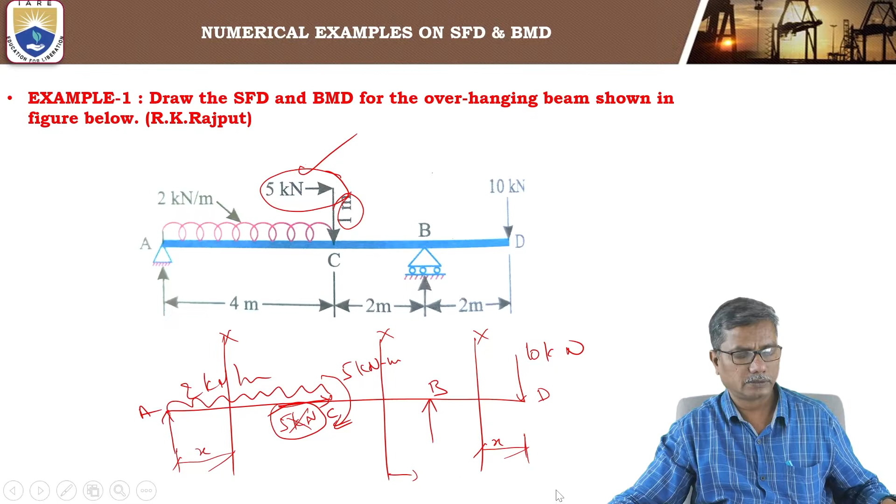Now with this, we will proceed to the first section between AC. So for this section between AC, considering the left hand side, origin taken at A.

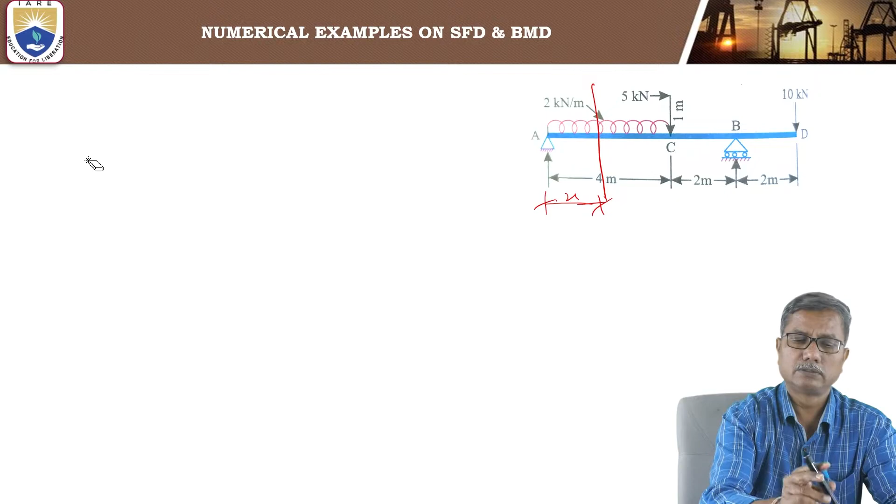Before that, we will find the reactions actually. So to find reactions RA and RB, we apply the conditions sigma MA equal to 0 and sigma Fy equal to 0. Two conditions we will apply to find the reactions RA and RB.

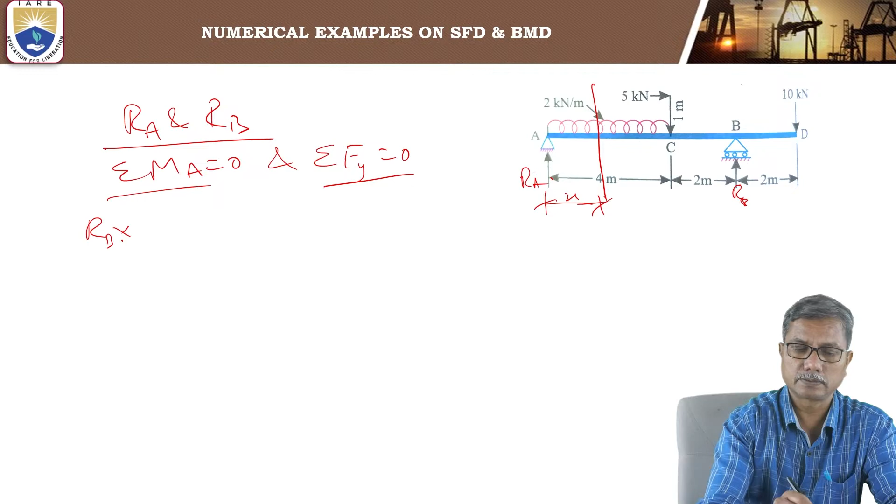So by applying the condition sigma MA equal to 0, we will have RB into 6 is equal to - in place of this, we have a couple acting, 5 kilonewton meter, we can replace this by a couple. Now the moments due to UDL: 2 into 4 into 2, where 2 is the distance of the resultant, plus 5 - this is a couple already, so we don't again multiply with the distance.

Plus 10 into 8. So now we will get reaction RB as 16.83 kilonewtons.

Once you get RB, we can find RA by applying the second condition, sigma Fy equal to 0. That is RA plus RB is equal to total downward load, which is 2 into 4 UDL plus 10 point load, that is 18. Therefore, RA is equal to 18 minus RB, 16.83, that is 1.17 kilonewtons.

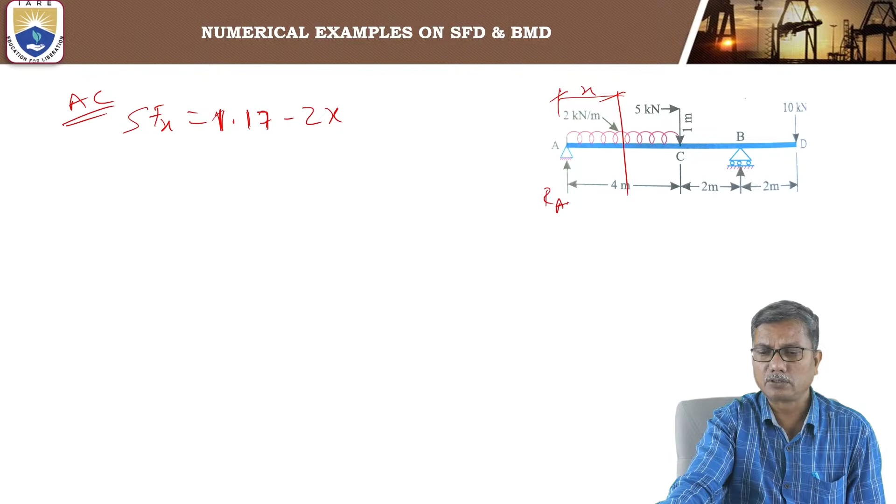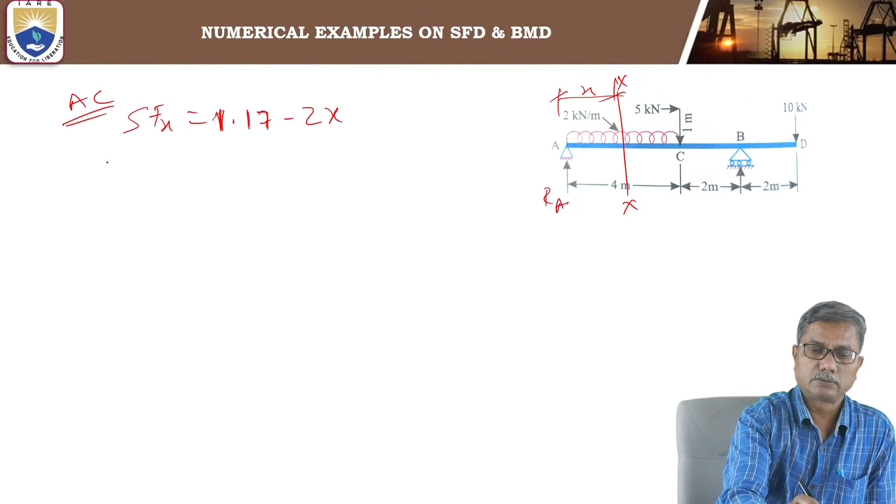Shear force at section X is RA, that is 1.17, minus UDL 2x, total UDL to the left of the section. So now the limits for X are 0 to 4. In portion AC, X varies from 0 to 4.

So at X equal to 0, the section will be at A and shear force at A is 1.17 minus 0, that is 1.17 kilonewton. It is positive only because the convention that we follow is left side upwards is positive and right side downwards is also positive.

Similarly, at X equal to 4, the section will be at C and shear force at C is 1.17 minus 2 into 4, that is minus 6.83.

So if you observe, the shear force is changing sign between A and C, which means it becomes 0 at one point. Shear force becomes 0, changing sign at one point from positive to negative.

So to find the location of that point where the shear force is 0, we equate shear force at X to 0. This implies 2x...

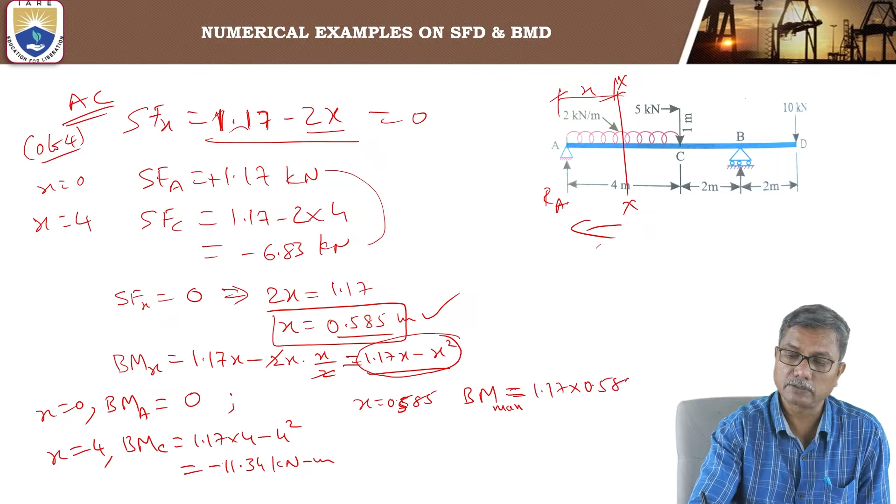1.17 into 0.585 minus 0.585 square, which comes out to be 0.342 kilonewton meters. We will be getting this positive plus 0.342 kilonewton meters. That's clear.

Between A and C, the bending moment also changes sign. It means, between A and C, bending moment also changes sign, because the maximum bending moment is positive and bending moment at C is negative, that is minus 11.34. It means bending moment is changing sign at some point between A and C, which is the point of contraflexure.

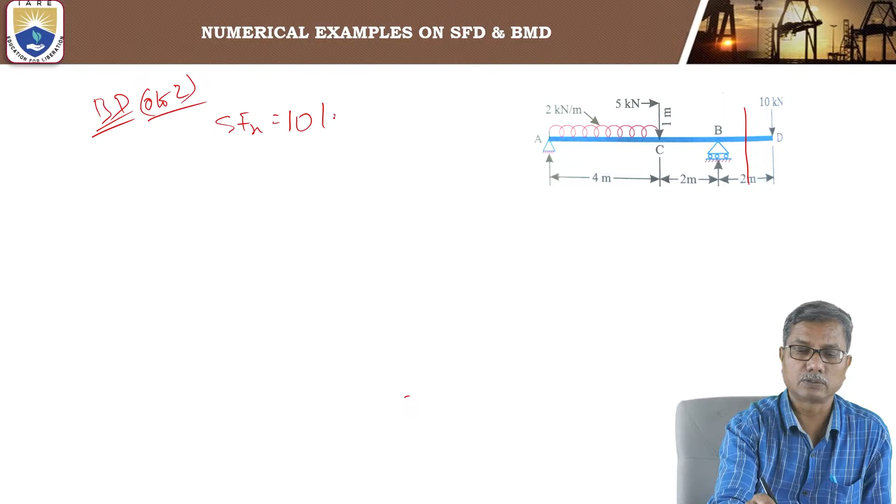Next, consider the section between B and D. Here you have only one force acting in this portion. This is the overhanging portion, and the limits for x are from 0 to 2. So shear force at x is 10 kilonewtons, right side downwards it is positive, and it remains constant from B to D because it is independent of distance. So shear force remains constant at 10 kilonewtons between B and D.

Now coming to bending moment, it is negative because it is hogging moment, so it is taken with a negative sign. Bending moment is minus 10x. So bending moment at D, that is at x equal to 0, is 0, and bending moment at B at x equal to 2 is minus 20 kilonewton meters.

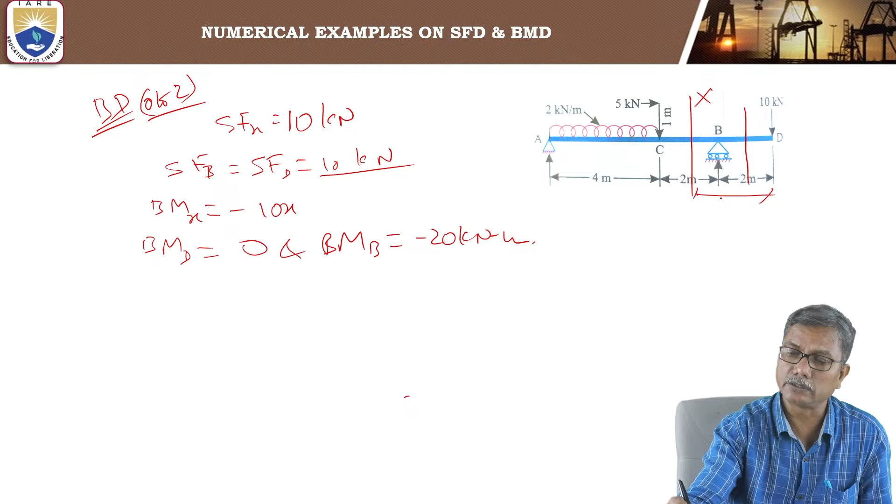Now consider section between B and C with origin at D only. The limits for x are 2 to 4 because we are taking origin at D. So now what is the shear force at x?

Shear force at the section is plus 10 minus RB. RB is 16.83, so it is minus 6.83. This remains constant between B and C because there is no load acting. So shear force at B equal to shear force at C equal to minus 6.83 kilonewtons.

Shear force at B, just to the left hand side, coming to this shear force at B here, just to the right of section B, it is 10. Just to the left, it is minus 6.83. That means at B, there will be a sudden change in shear force because of the reaction RB, and that change is equal to RB.

So now, to draw the shear force diagram, at A it is 1.17 and at C it is 6.83 minus. So it varies from plus 1.17 to minus 6.83, changing sign at this point. Let us call this point E, which is at a distance of 0.585 meters from here.

Now, between C and B, the shear force remains constant at 6.8. At B, you will have a sudden increase in the shear force because of the reaction. And between B and D, the shear force again remains constant at 10. So this is positive shear force, and negative shear force we will have here.

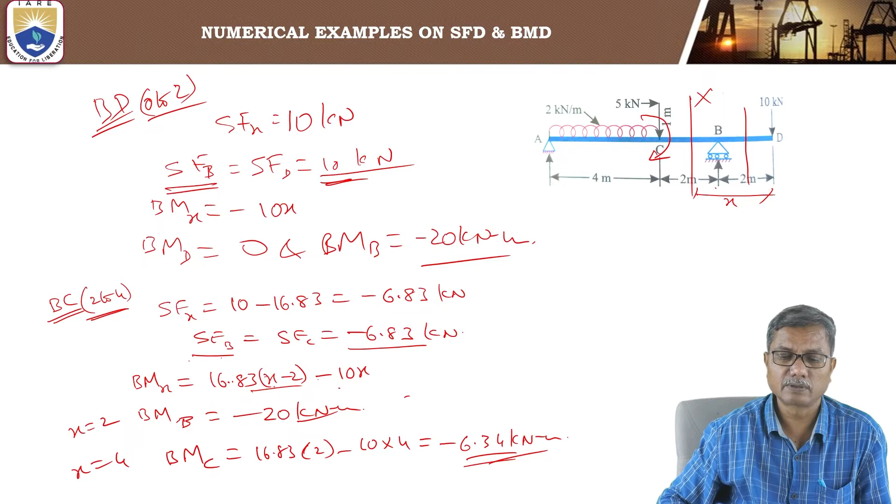It is generally not drawn to scale, actually very small, 0.342. It varies linearly. From A to C, it is parabolic only, and it varies up to 11.34, and there will be a sudden change here to 6.34 by 5 units, because of the couple. And from 6.34 it changes to 20, which is linear variation, a straight line.

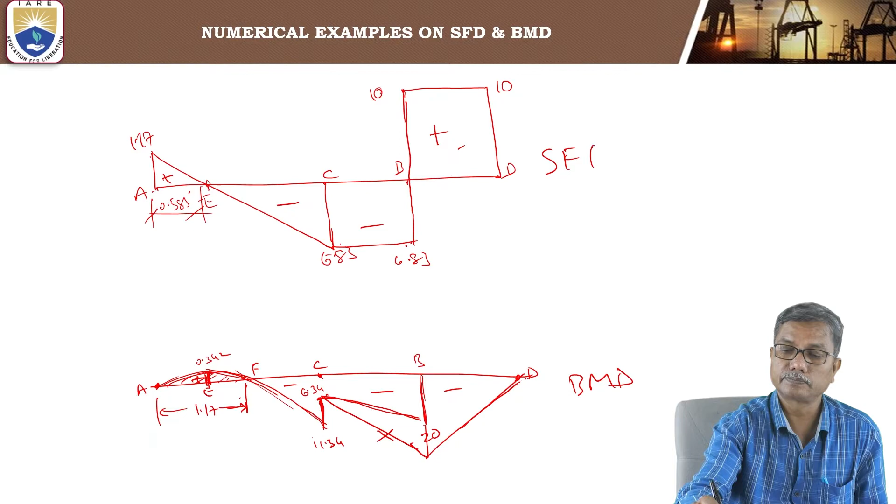So positive bending moment is here. This distance is 1.17, the point of contraflexion, and this is the point of maximum positive bending moment. This is how the bending moment diagram will be shown. So this is the bending moment diagram and shear force diagram for the given problem.

Let us take another example, which is a beam overhanging on both sides, supporting a UDL and a point load. Let us consider this second example of an overhanging beam on either side, overhanging at both supports A and B, and supporting a UDL and a point load.

So now, as usual, we find the reactions RA and RB. Applying the condition sigma MA equal to 0, you will have RB into 11, that is anti-clockwise, RB into 11.

And the portion of UDL to the left of A also produces an anti-clockwise moment. So the moment of this UDL, 30 into 3 into 1.5, is also anti-clockwise. That is equal to the moment of the UDL lying to the right of A, for a length of 5.5 meters, total length of UDL being 8.5. So 30 into 5.5 into half of that is 2.75, plus 100 into 11 plus 4, that is 15. This gives the reaction RB as 165.3 kilonewton.

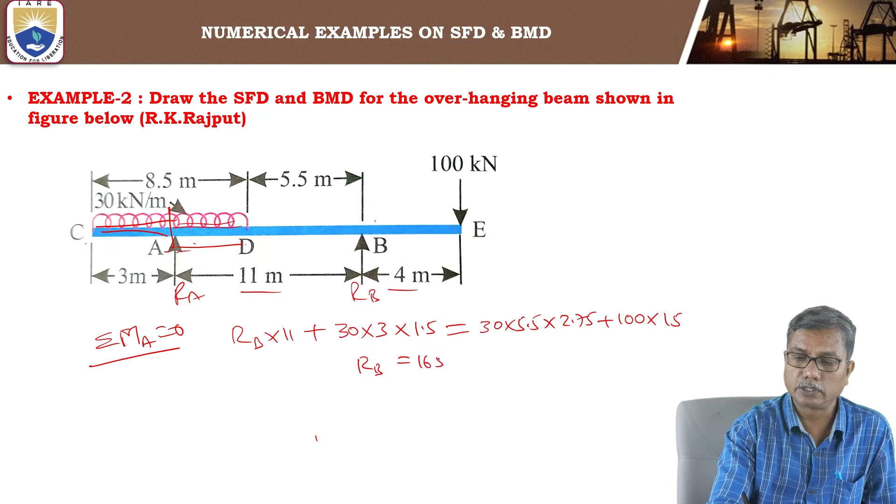Now we can find RA as total downward load, 30 into 8.5 plus 100, minus RB of 165.3, which comes out to be 189.7 kilonewtons.

So first we have to find the reactions before proceeding to calculate the shear force and bending moment. Once you know the reactions RA and RB, then it becomes easy. Now, how many sections do you have to consider? Just observe—we need to consider 4 sections.

Okay, 4 different sections we have to consider for finding out the shear force and bending moment at various sections.

The first section we consider is between A and C, taking origin at C. Similarly, for the second section also we'll take origin at C. For the third and fourth, we'll take origin at E. So consider first the section between A and C.

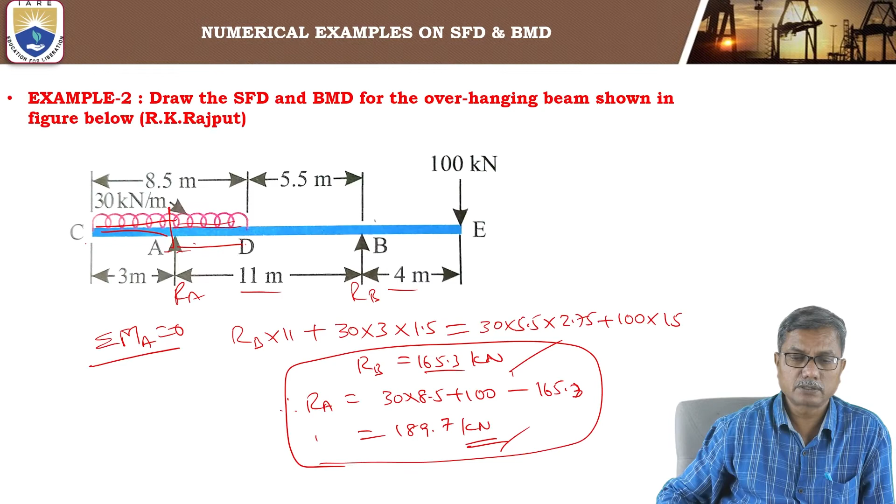So on the left side, downwards, you have the UDL acting downwards on the left side of the section. So it is negative, minus 30x.

So the variation of shear force is linear. From this equation it is clear, it is a straight line equation.

Now substituting x equal to 0 and x equal to 3, you will get the shear forces. At x equal to 0, shear force at C is 0. At x equal to 3, shear force at A is minus 30 into 3, which is 90 at A.

Next, bending moment at section X is minus 30x into x by 2.

Only UDL is acting to the left, so it is negative because it is a hogging moment. So 15x square is the bending moment at section X.

Now at x equal to 0, bending moment at C is 0. Now at x equal to 3, we will get bending moment at A as 15 into 3 square, that is 135.

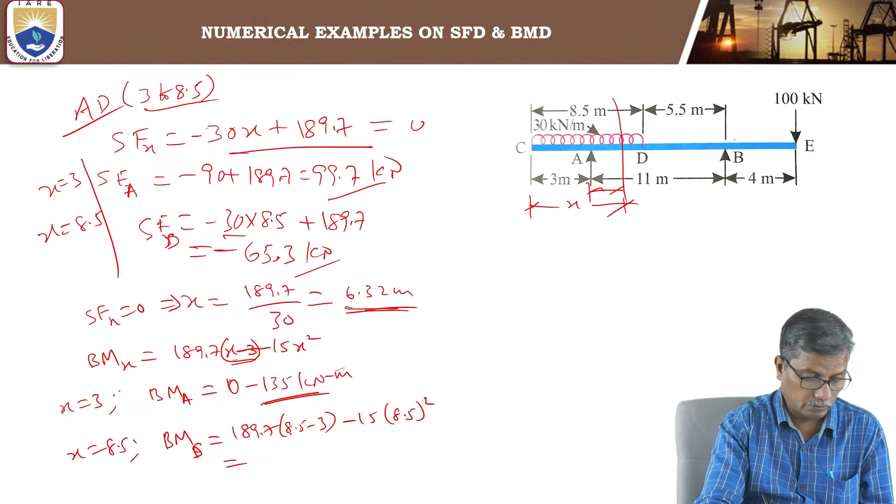At x equal to 8.5, we will get bending moment at D: 189.7 into 8.5 minus 3, minus 15 into 8.5 square.

So you'll get bending moment at D as minus 40.4 kilonewton meters. Understand?

So in between, we will have maximum positive bending moment at a distance of 6.32. So at x equal to 6.32, the maximum positive bending moment is 189.7.

189.7 into 6.32 minus 3, minus 15 into 6.32 square, which comes out to be 30.7 kilonewton meters.

30.7 kilonewton meters, which is the maximum positive bending moment, occurring at a distance of 6.32 meters from C, the left end.

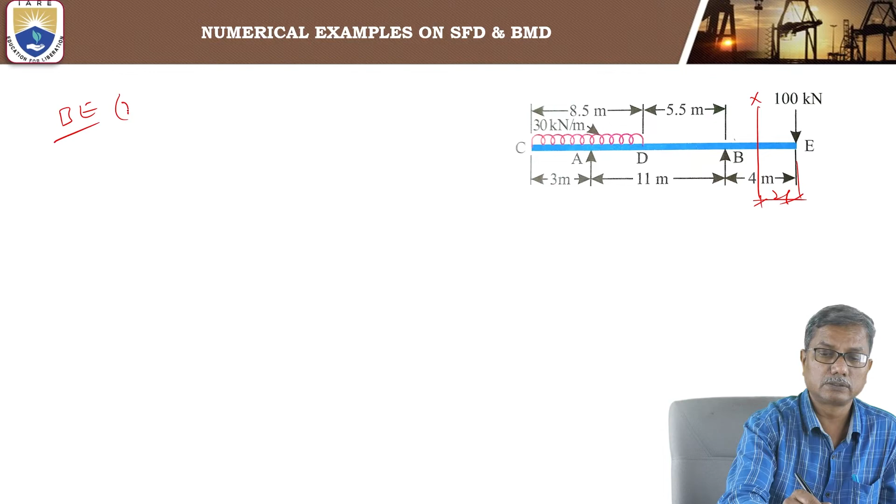So the limits are 0 to 4, X varies from 0 to 4. So shear force at X is plus 100. As per the sign convention, it is positive. So shear force at B and shear force at E are equal, 100 kilonewtons. And bending moment at X.

Bending moment at X is equal to minus 100x, because it is hogging bending moment, it is negative, minus 100x. So at x equal to 0, bending moment at E is 0. At x equal to 4, bending moment at B will be minus 400 kilonewton meters.

Now consider the section between B and D. The limits for x are, origin is taken again at E only. X varies from 4 to 4 plus 5.5, which is 9.5. So 4 to 9.5 are the limits for x.

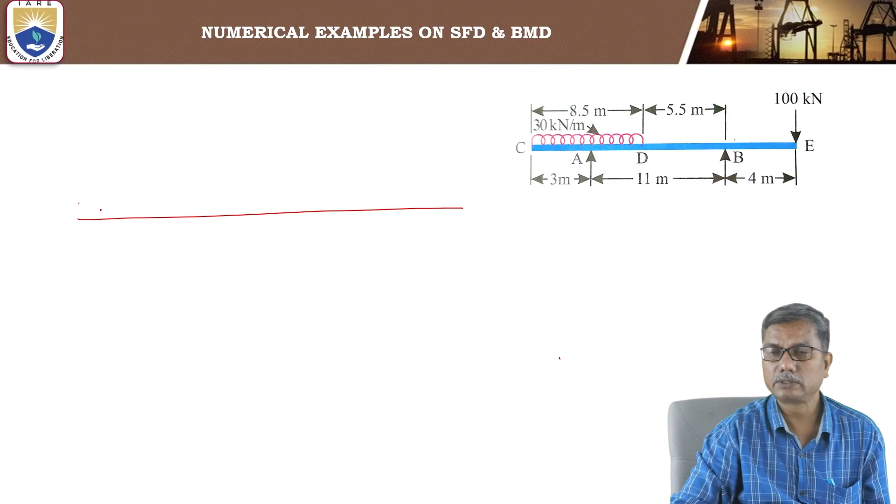And before that, what you can do is, you can locate the point of contraflexure actually. That we'll see later. First, let us see the shear force diagram for this. At C, the shear force is 0. At A, the shear force is minus 90.

Next, coming to E, the shear force is 0. And at B, it is positive. Shear force at B is positive actually, 100, which remains constant.

Next, 65.3. Shear force at B is 65.3, which remains constant up to D. It remains constant at 65.3.

Next, between A and D, the variation of shear force is linear. So the shear force, it is 90 here.

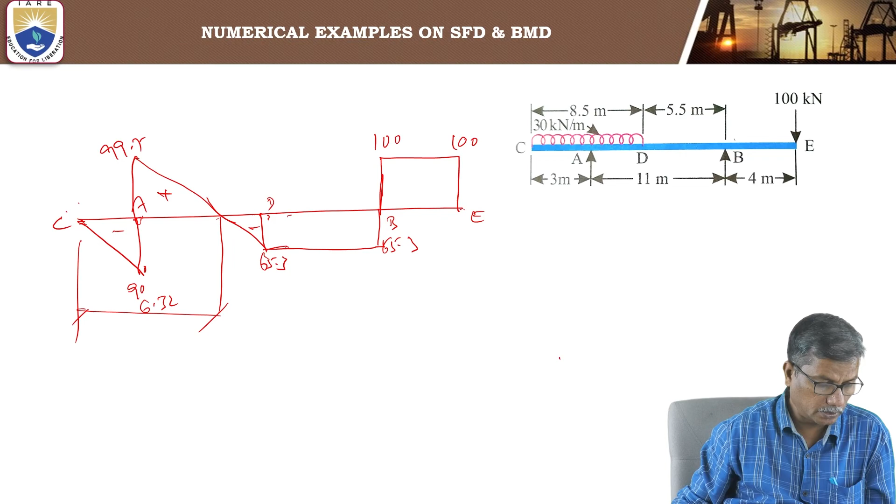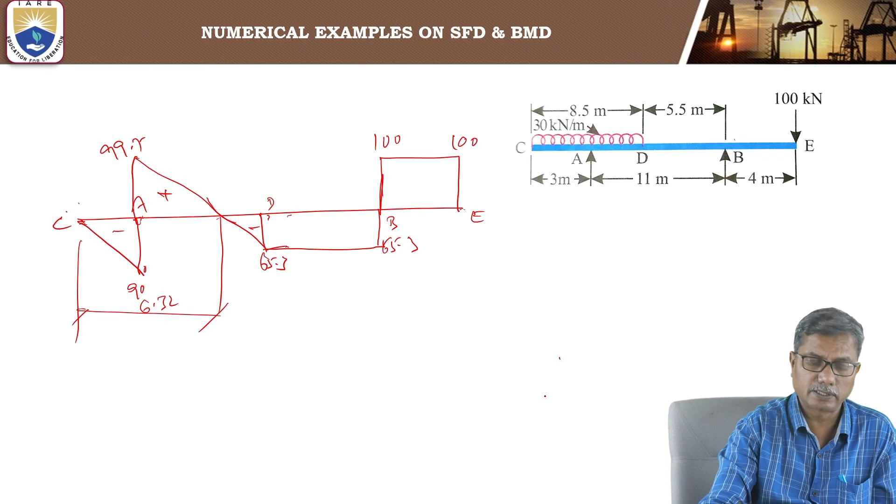At this point, you will have maximum positive bending moment, which is found to be, this point is H, bending moment at this point H is 30.7. It is calculated as 30.7.

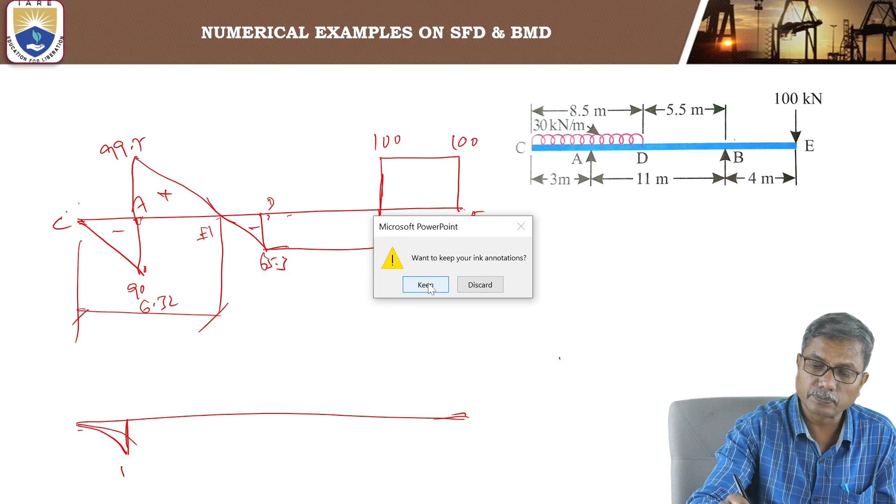Now coming to bending moment diagram, we will have negative bending moment here from C to A. So bending moment at A is 135, minus 135.

Similarly, bending moment at B is minus 400. And bending moment at D is minus 40.4.

And at 6.32 it is 30.7. Bending moment is 30.7 positive at this point H. So it varies parabolically between A and D.

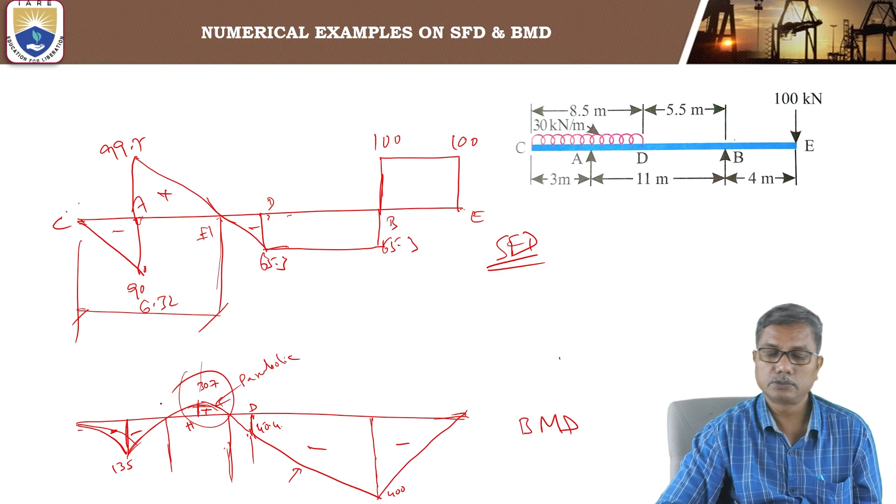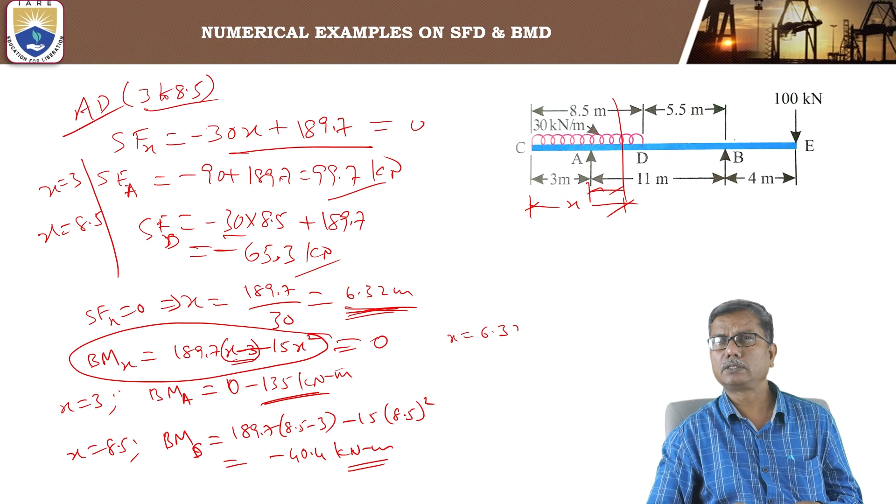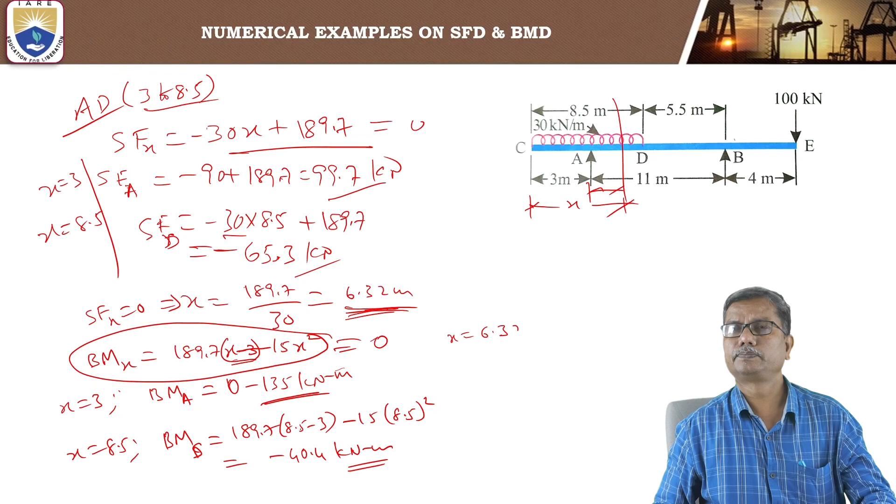And these points where the bending moment is changing sign are called points of contraflexure, which can be located by equating bending moment equation to 0. By equating bending moment equation between A and D, the equation for bending moment is this one. So equating this to 0, you will get the values of x. That is how we draw the shear force and bending moment diagrams, finding the salient points in the beam.